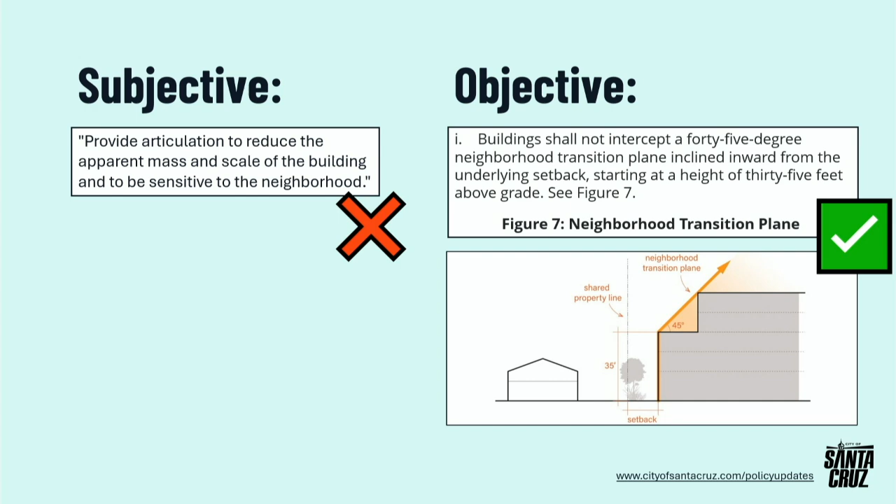It's defining this neighborhood transition plane that refers to the underlying setbacks and the starting height. So you can see that objective standards are often a lot more technical, but it is something that, especially when staff look at design proposals, they can look at it and say, okay, we feel that it's very clear, yes or no, you have met this standard. The reason that we use these objective standards is that the state requires that we use only objective standards when doing design review. So that's a little background on objective standards.

So in terms of the goals of this update in general, big picture, we just want to refine the standards that were approved in 2023. There was a big public engagement effort in 2021, 2022 that informed the community's idea of what they wanted these design standards to be. And our housing element instructs us to update these standards periodically. We also want to learn from what we see with the developments coming through and see how we can continue to improve the outcomes for the community.

So some of the ways that you'll see that in this update, we're talking about adding flexibility that helps support housing development in general, and especially affordable housing. There's a few things that we heard from developers, changes in design that could make things more feasible for them. You'll see that in some areas we're talking about reducing certain requirements, but in other places we're taking things that are optional and making them required. And this is a way that we want to maintain a variety of form in our proposals, because that was something that we really heard strongly from the public, that they want to see this variety of form in buildings.

One thing that we're doing with these standards is we're trying to encourage partial compliance rather than waivers. So this relates to the state density bonus, which some of you will be familiar with, but developers that are taking advantage of the state density bonus law are afforded these waivers that allow them to waive out of a lot of standards, including design standards like those in this section of code. We think with some of the changes that we're making here, we're going to see that the plans come in and they're more aligned with our existing requirements without needing waivers. So even with partial compliance, we'll get more of what we want, right? And that's a good outcome for the community.

All right, this is a fun slide. So we talk a lot in the requirements about changes in plane. And so I would just want to introduce this concept right off the bat. You can see it in this top left image here. The change in plane is where you make a change in depth of that flat facade of your building. And this is something that gets referenced throughout the requirements.

Changes in plane are a really great way to provide variation and visual interest in the facade. They help break up the building from looking like a large mass and instead having it look like a series of sort of connected volumes, and that's really something that makes for high quality buildings. And so in our current requirements, the number of changes in plane that buildings are required to incorporate is the same regardless of how tall or how long your building is.

So for every 30 feet of the front length of your building, you're required to have one change in plane. And there were some different options about how deep that change in plane might be. So as we were seeing development proposals come in and hearing from developers, we're sort of seeing two issues with what's happening with that. On the smaller buildings, maybe a small residential project, we'll look at an example in a minute, there's a number of changes in plane required,

even though it's a very small building. And then with each of those changes in plane, you have to change materials at the same time. And there's other limitations about how much space the material can take up on a facade. So these smaller buildings were getting very, very busy and kind of not having the desired outcomes, a real variety of materials when they could maybe be simpler or more elegant.

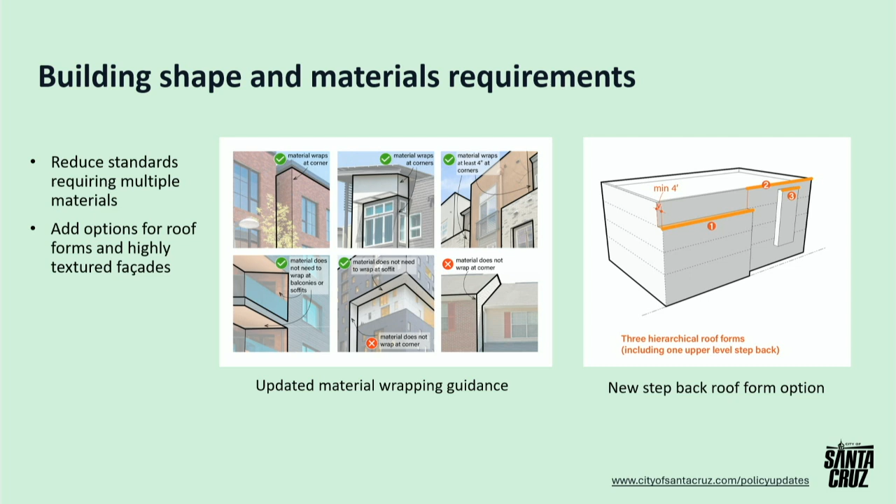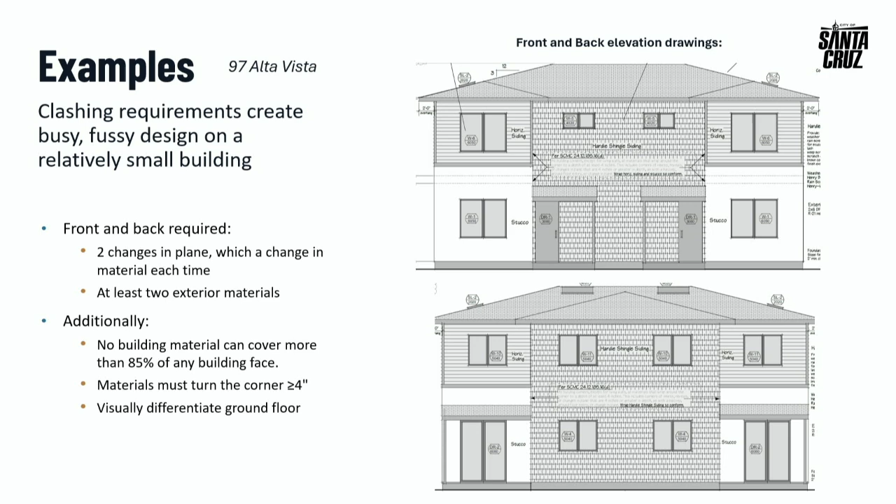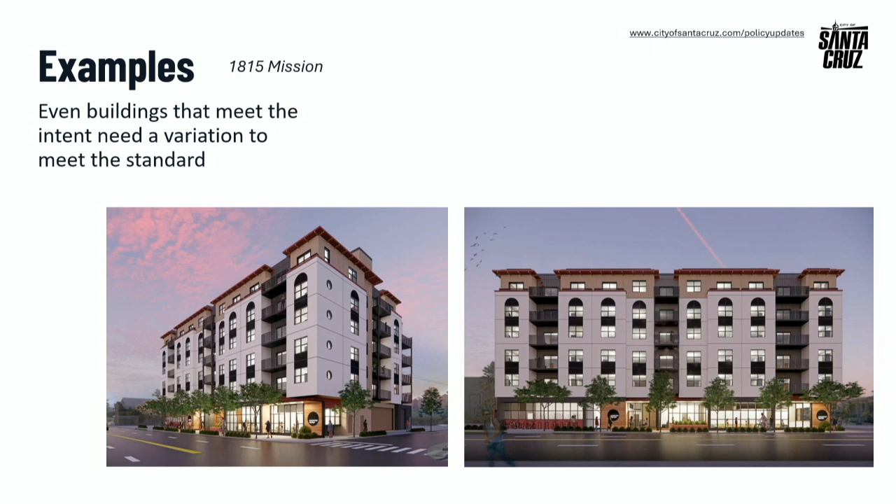And so we had to go through the variation process, and that adds time and uncertainties to the process. So projects like this with just a little more flexibility in our design standards would probably come in meeting the standard already. And that would help create consistency and potentially speed some of these approvals through. So those are just some examples of the sort of building and materials effects.

The last 2 sections on the ground floor design and then the fixes are getting into more specific, case-by-case fixes. We want, in general, to add a little bit of flexibility for affordable projects, and we had a developer specifically mention we were requiring a 15-foot minimum ground floor height for mixed-use buildings, and they said that if we could allow them to go a little bit lower, down to, say, 12 feet, then they wouldn't have to use concrete and steel construction on the ground floor. They could do all wood construction, and that would make their projects more feasible, and felt like you could still have a pretty good high quality business, good windows and everything with a 12-foot ceiling.

So there's a proposal in here that for projects that are 50 or more percent affordable units, they can have that flexibility about the ground floor heights.

The ground floor activities, we talked about changing some permit processes to support businesses. From talking to our economic development staff, they basically said, is there any way that there's more types of uses that could be more principally allowed without having to get a use permit or go through a hearing? Like, there's probably some uses in our lists that might qualify. So we did a deep dive and reviewed a lot of them and identified, I think, there's 5 that we're proposing to add that would basically be principally permitted, allowed to open without a public hearing. And then also we added thrift stores as well due to some changes in state law. So that's detailed in the staff report.

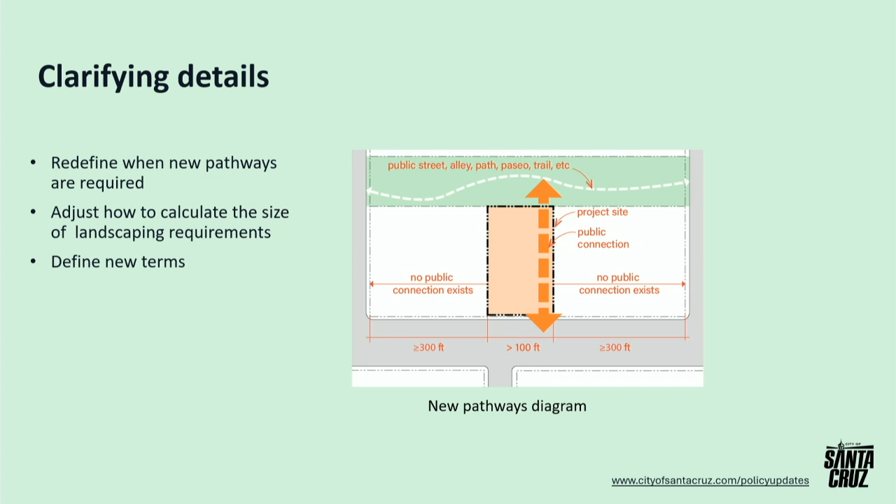We also made a little adjustment on our landscaping requirements. They were kind of scaling in the same 30-foot increments, and now we just added a different figure so that for every linear foot, you have to have so much landscaping. And then we defined some new terms throughout that helped us clarify just about which sides of the building are public street frontages versus other types of alleys, paths, and that kind of thing. And there's some other details; everything is detailed in the staff report if you want to dig into that. So that's the details.

We held our community meeting on March 13th. It was a more informational session. We had just a range of comments about some people asking for examples of good design on the east side where this would apply. These rules apply outside of the downtown. People asking about should we reduce the requirements. So we took their comments in and noted it in the staff report. We're here tonight at the Planning Commission meeting. Assuming this goes forward, it's on the schedule for a May 27th City Council meeting, and also after that to be submitted to the Coastal Commission.

I do also want to note for the City Council meeting, there's a couple changes that Public Works is putting forward that's related to this. They're updating their objective standards on bicycle facilities along some of the main corridors, and also potentially updating requirements around trash rooms and the details around the design of trash rooms. So they're running that through their Transportation and Public Works Commission, but when we go to City Council meeting, that'll be captured in with this. So with that, this is the recommendation that we have. It's the same one as in the staff report. That's the presentation on objective design standards.

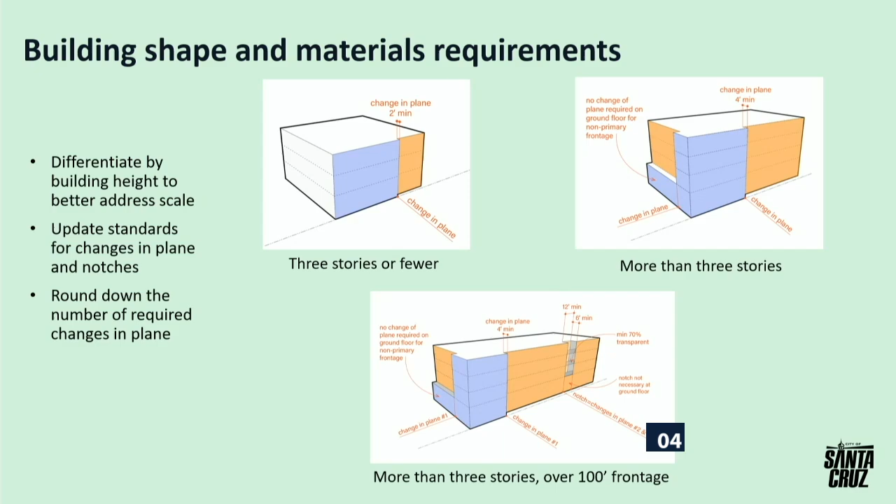And more of a comment, but I love addressing the flat roof thing with the series of downtown buildings. As the standards change, you can really see the difference with that flat parapet. I get it, it saves money, but I really like seeing the notch in that respect, that setback. I wonder if there's any way we can even more encourage sloped roofs, or if that's impossible. Does that make sense? Sorry to ramble on. Is there a way to enhance encouraging sloped roofs at that top level?

I think that's probably a question for a developer. We have things that we can require, and we are constantly in this battle with what's going to be economically feasible and therefore incentivized in development. Flat roofs are really easy to build, and easy to build your mechanical systems on and fit your solar and have your projecting elevator shaft that's screened by your parapet. There are a lot of reasons that on this type of building with modern mechanical needs, they end up with flat roofs.

So I would be cautious about creating requirements for slope, because I think that could start to impact the upper story of a building and just add complication. I totally hear you. Solar panels, yes, of course, but it seems like flat and notching back is good. Anyway, it might be something to think about a little bit more.

I've heard this very consistently through 14 years of service from every neighbor: we want tile roofs, we want metal roofs, we want more roof lines. So I get that it costs money, but particularly for those big buildings, it seems like a little bit more could be done or added. I get it, this is fully baked and it's a new idea, but I just wanted to put it out there. All right, those are my questions for now.

Here is a map of the residential zone districts in the city. As you can see, it covers most of the city except for some areas near the beach and the downtown and our industrial areas, and then our major corridors.

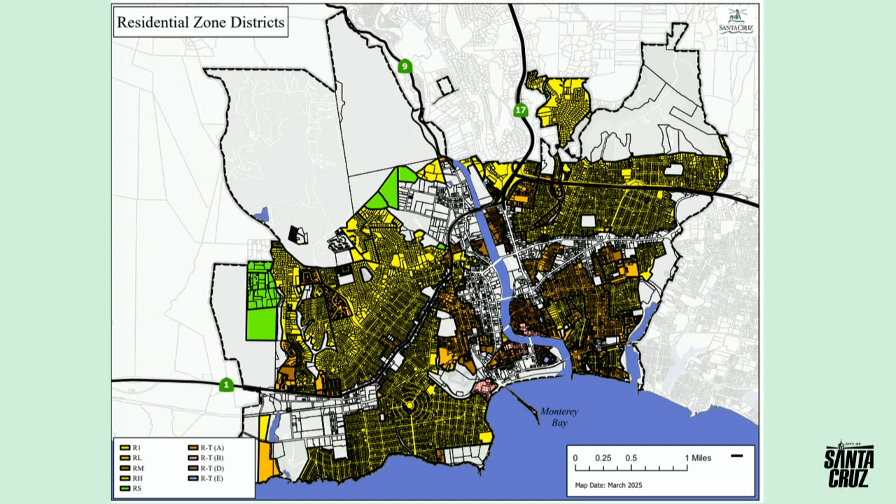Okay, moving on to low barrier navigation centers. State law requires us to implement code changes related to low barrier navigation centers. A low barrier navigation center is defined as a facility that provides temporary living facilities while case managers connect clients to income, public benefits, health services, and housing.

And I'll also mention that our housing element, objective 3.3L, also calls for us to be consistent with this state law. So in these navigation centers, clients are allowed to keep their partners, pets, possessions, and privacy. So I guess that's the 4 Ps. The city must allow this use by right in all mixed use or commercial zone districts that allow housing.

Note that the ordinance in the packet includes this in the mixed use zones, the community commercial, the neighborhood commercial, commercial thoroughfare, and the PA zone, what is P? Anyways, professional and administrative, thank you.

Okay, so we are also gonna add this use into the RTC and the CB zones. And those are, I believe, in the lower beach, flats, beach, boardwalk sort of area of town. So that's gonna be added into the ordinance that goes to city council. And the state law also determines the operational standards that these uses must abide by. And that is also part of our proposed ordinance.

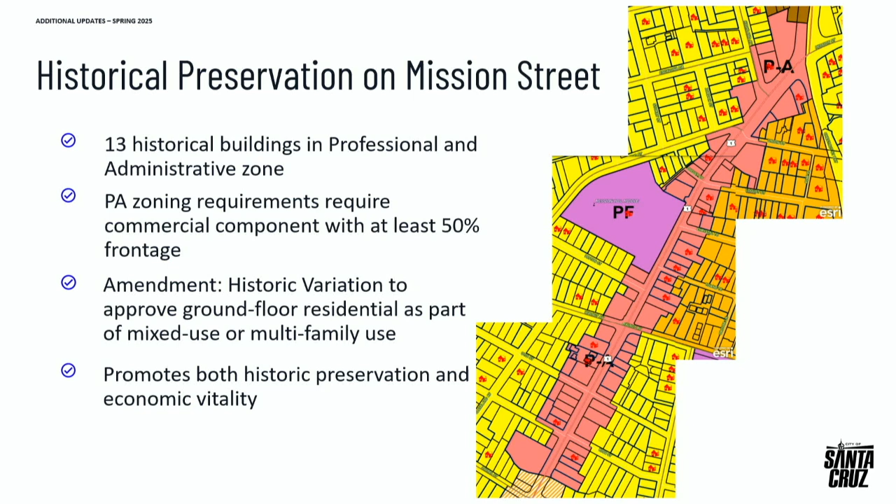So what these amendments would do is retain the economic functionality of these historic buildings while ensuring the continued rehabilitation and preservation of the building's historic qualities. I would like to note that this variation is already allowed in all commercial areas of the city, except along Mission Street and in the downtown plan area. So this would make a small change in the buildings eligible for this variation. And that concludes my presentation. I am available for any questions.

All right, wonderful, thank you. At this time, we'll take questions from commissioners, and then I think as a matter of process, we do have to open this item up to the public too and receive public comments. So we'll do that after questions for this particular segment of the item. So any questions from commissioners?

Commissioner McKelvey. Thank you again. These are all very complicated and somewhat vexing topics. Similar question to the ones that I had in the previous section. For example, the reasonable accommodations section, are there applicability thresholds again based on number of units or size of building or anything like that? Are we talking about a duplex again, or where do these apply?

So reasonable accommodations come out of federal fair housing law. And they apply to any site or any unit where someone with a disability or a household with someone with a disability is trying to access housing. So they could be applied to a single family home, they could be applied to a whole site of a multifamily development if it's being developed by a developer who has an intended population that has a higher likelihood of having those disabilities. They can be applied for with existing buildings; we've had them come in for fences. People want to do an overheight fence because they have a family member that needs more privacy in their yard. So it could really be any kind of residential property.

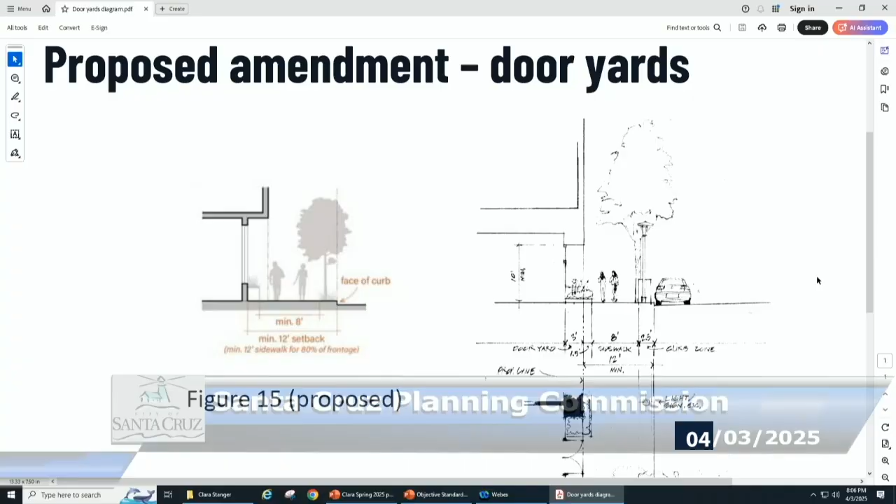And I think it's very useful when we're designing our streets, and we are talking about the area between the curb and the building, to be mindful of what we expect out of this very public space. So I routinely call the area between the face of the curb and where people walk the curb zone, because it is where all of that stuff ends up. And if you walk down Pacific Avenue and start listing all the things that we put in the curb zone, it's remarkable, from fire hydrants and signboards and street lights and trees and all of the rest.

And so what I am suggesting, oh, look, it's on the screen, I had submitted this sketch, that was really kind of relevant to Pacific Avenue or downtown. But it indicates that the curb zone is just 3.5 feet wide. And then the sidewalk I've described here is 8 feet, but that's really unique to the location. There would be some places where a 12-foot sidewalk or even a 16-foot sidewalk would be appropriate.

But in a typical downtown area, 8 feet is about right, because that allows people to pass each other, as two couples passing each other without having to step aside. It allows a free flow of pedestrian traffic. And so that's kind of a starting point.

But I think that sidewalk width is something that is variable depending on the location and the pedestrian density for that location. The other part of it, though, is this thing called the dooryard. And I got kind of caught up in the subject of dooryards a while ago.

It was having dinner with a remarkable Egyptian urbanist who explained the history back to ancient times of the dooryard, because merchants wanted to sell their stuff to people walking by, but the road was owned by the emperor. So the merchant had to get the permission from the emperor to have his stuff out on the road. And we're really talking about the same thing even now.

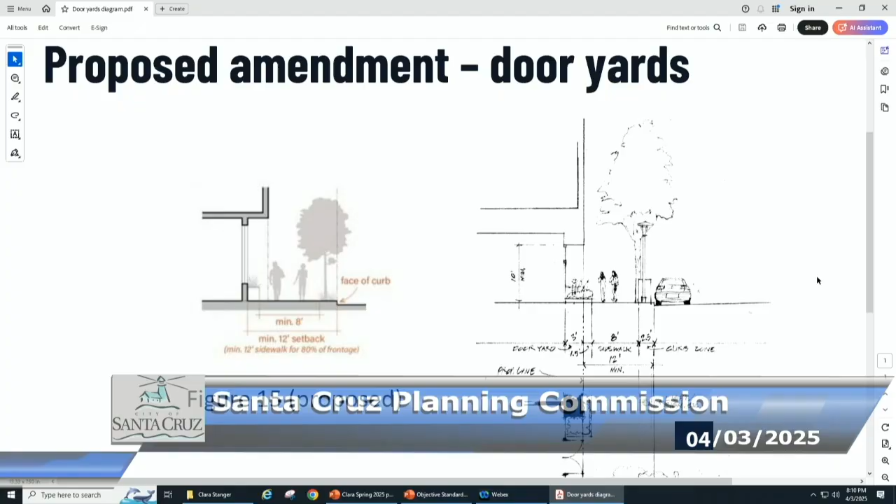So my suggestion here is that, first of all, we recognize that the dooryard typically would have to be 3 feet because the door has to swing into something that's not a sidewalk. That would get in the way of people walking by. And what I'm suggesting is that, in fact, we consider the sidewalk to include the dooryard, and that the dooryard in a place like on a major street would essentially mean that a portion of the ground floor has to be set back 3 feet to create this dooryard.

Now, I'm totally open to the notion that it doesn't have to be 3 feet for the entire frontage of a building. But I think that there's a pretty good argument that there should be a dooryard of something like 2 feet so that there's room for plants, A-frame signs or something like that that is not in the street, because it's not impinging on the public being able to enjoy a sidewalk.

But I think that we should include in our standards some acknowledgement of the dooryard, that you have to have a dooryard that accommodates doors swinging open that don't cross the property line, so that the door swing is entirely on the private property, and I would encourage that we require something like a 2-foot dooryard on any of our commercial streets where we expect pedestrian traffic. And it doesn't need to be the entire frontage. The columns supporting the upper floors don't need to be set back.

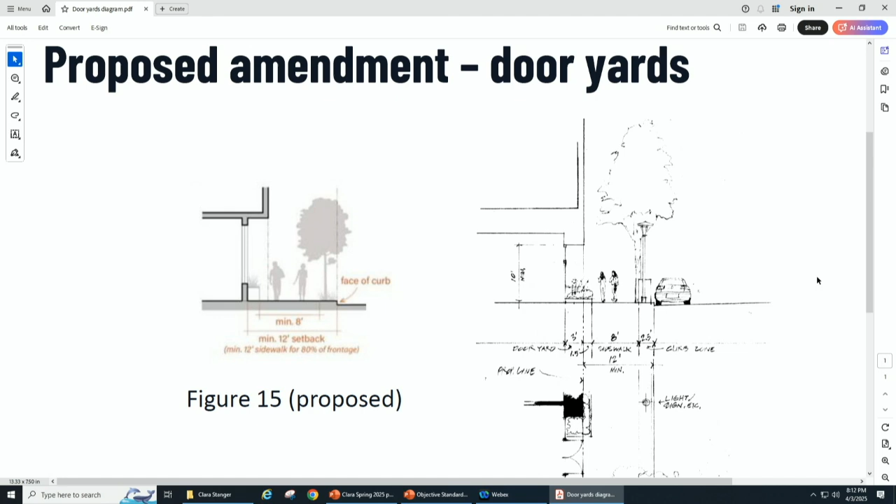It's a pedestrian street. And so we wouldn't allow somebody to put a fire hydrant in the middle of the street. We'd insist that it be off to the side in the curb zone. So it's just acknowledging that sidewalks are serious ways for people to get around in our towns, and that we can set aside a sidewalk and then acknowledge that there's other stuff that doesn't belong in the way of the sidewalk. So, I don't know, I'm not clever enough to put it into code language.

So I accept the friendly amendment, that's great. Just to be clear to the public, we're adding a friendly amendment to the motion that was just passed. And if everybody's good with that, I'm good with that. Or should we start? We might want to, I mean, I don't necessarily think we need to start clean unless staff thinks it's... Yeah, we can do just a revote again, with that amendment in there.

And just to clarify, what this is intended to do is bring whatever details from Commissioner Thompson's diagram into this figure 15 and edit that as possible. Staff has been, and thank you again so much, Commissioner, for reaching out to us ahead of time.

It was really appreciated and gave us some time to coordinate with Public Works on this, because they do also have some jurisdiction over the sidewalk. And so there is some analysis we still need to do on ensuring there's consistency across their standards and our standards and what Commissioner Thompson drew. But initially, in talking with Public Works as well, there's definitely changes and improvements we can make on that figure 15 based on your work. So thank you for that.

Okay, great. And I want to get Commissioner McKelvey's comment in here too, especially if we're going to be adding a friendly amendment. I also have a comment. Okay, and Commissioner Kelly, can we bring the recommendation back up? And I know, Commissioner Thompson, that you probably don't have any firm language yet, as I understood it. So I think that friendly amendment could go down at the bottom where you could wordsmith something really quickly and just say that we want to have a recessed, I'm sorry, what was the word you used again? A dooryard? Dooryard. So a dooryard.